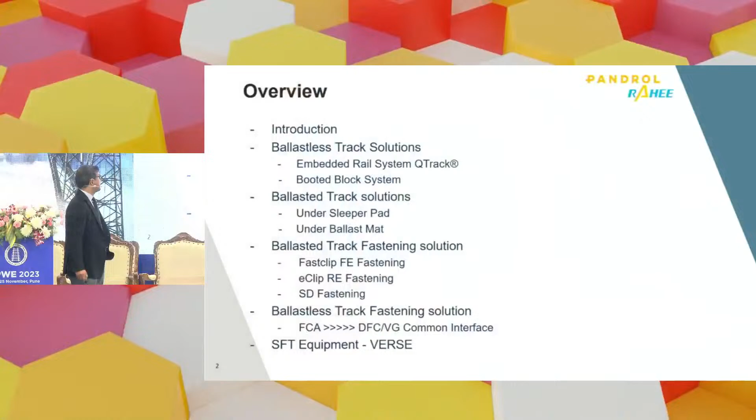So here we go. We have a string of solutions to offer in ballastless and ballasted track solutions, in fastening, in track solutions, and in equipment. Pandrol, as you know, has been a driving force in the rail industry. We have a world speed record of 575 kilometers. We have the longest heavy haul track, and we have the world's highest track in Tibet.

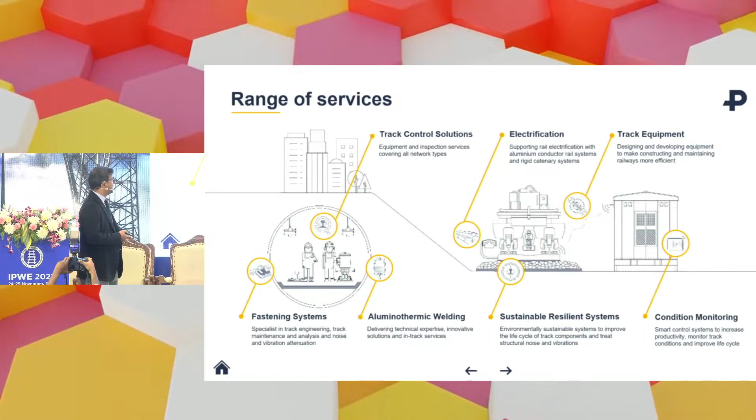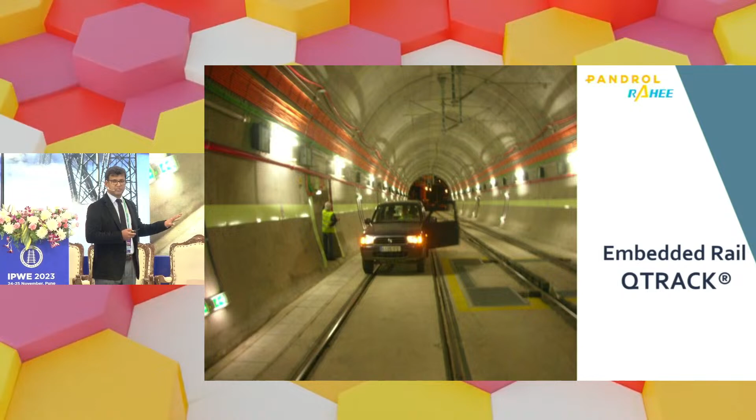The first solution that we are showing here today is the embedded rail system QTrack. QTrack also stands for Quiet Track, but primarily it's an embedded rail system. So here in this picture, you can see that there's a tunnel, there's a train track, but a car is also plying on the same track. So this concept can be utilized in hybrid tunnels in the mountains where the same track can be used for vehicular traffic as well as rail traffic.

Now, this is a continuously supported and clad embedded rail system where, because the rails are completely clad, the stresses in the rail are far reduced, and there are no fasteners, so there is absolutely no chance of corrosion here. And because the rail is continuously supported, the stresses are low, there are no sleepers, so there are basically no additional components for fastening the rail to the track. It is just this embedded rail system.

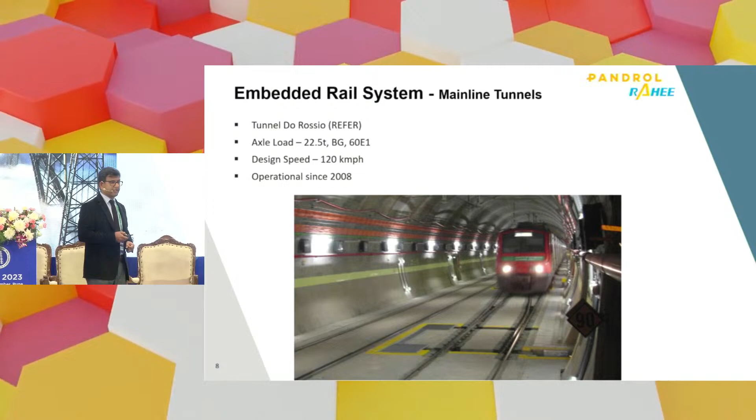Here again a picture from Portugal, in Tunnel do Rossio, for 120 kmph design speed and 22.5-ton axle load. It has been operational since 2008. The system is proven for 160 kmph and higher speeds. A Mirfa depot in Etihad Rail. So we can use this system for hybrid tunnels and for depots.

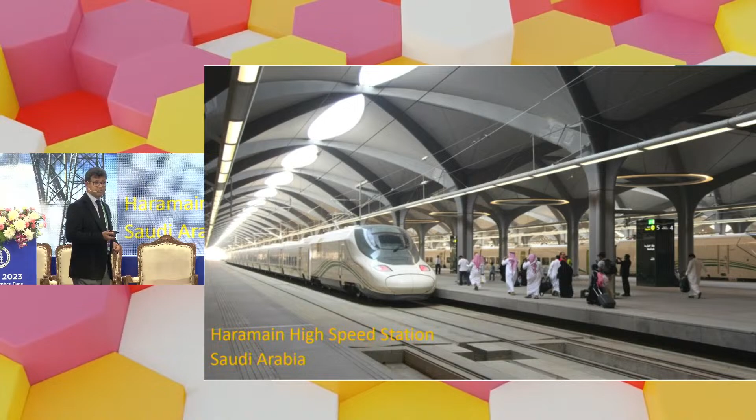This we have done in Delhi, in DMRC Badli depot, where we have laid 1 kilometer of track. This could be used in modern stations to have a very clean look for the track. And this picture is from the Makkah Medina line, Haramain high-speed rail station.

This system offers one of the thinnest ballastless tracks, which can be utilized in tunnels where you have very less height available. Because in tunnels, if you put a ballasted track, it can take substantial height of the track. So this system forms one of the thinnest ballastless tracks in tunnels.

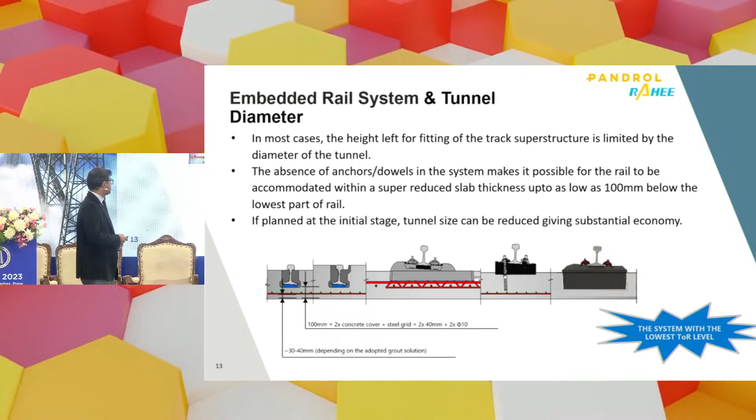Advantages: it's a maintenance-free solution. It's free from corrosion. There's no theft, no sabotage, not prone to any vandalism for the fastening components. Rails are encapsulated, so there is some kind of vibration isolation also available because we are lowering the stiffness of the entire track by putting this solution in.

And the possibility of rail fracture is greatly reduced because of lower stresses in the rail. And it has a very high longitudinal rail restraint, the creep resistance, because the rails are continuously enclad in these rubber profiles. And it can be used both for vehicular traffic as well as for rail traffic.

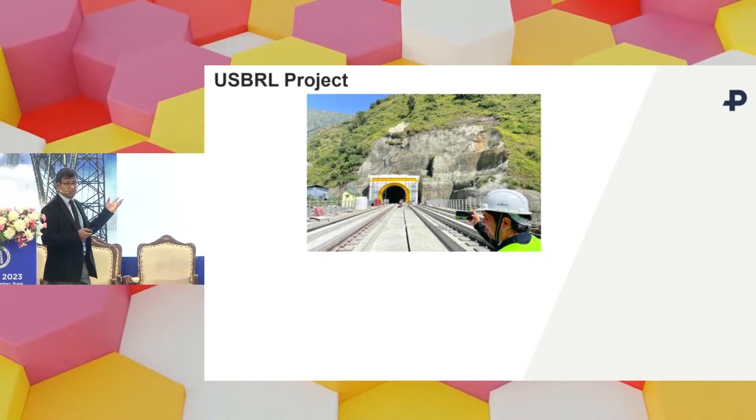The second system is the booted block system. Now, this system we have used in the USBRL project for almost 70 kilometers of track. More than half we have already done. The work is still going on. So we have installed this system in the tunnels, on the bridge, on viaduct, and on embankment as well. So these are all the uses that we have done.

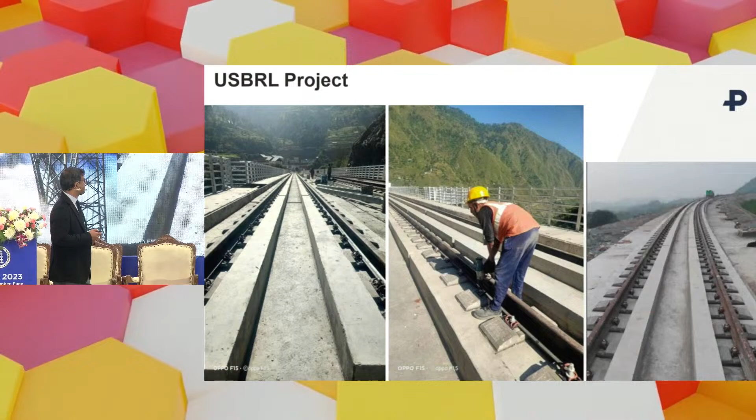These are some beautiful pictures from the mountains in Kashmir, where this system has been installed. The anchors are being installed using a torque tightener here. So look at the system. This is an ideal ballastless track system. Basically, because it's a ballastless track, there's no ballast. So the resilience of ballast, which has gone missing, we have introduced with this booted block here.

And if you look at the distinctive features of the system, this system is the closest and best idealization of ballasted track by virtue of offering a precast rail seat coupled with the required resilience and adjustability as obtained otherwise in ballasted track.

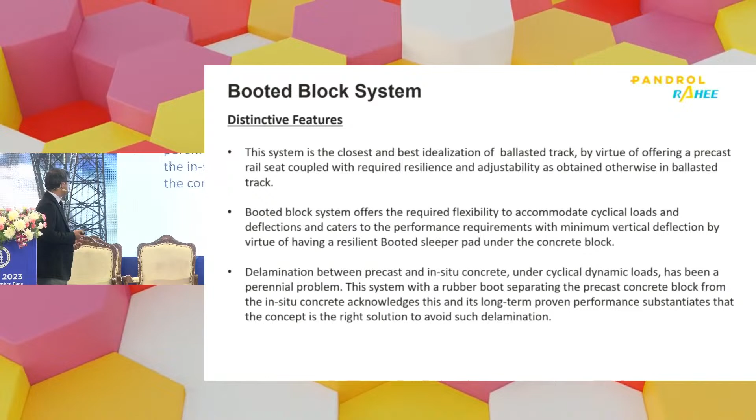Booted block system offers the required flexibility to accommodate cyclical loads and deflections and caters to the performance requirements with minimum vertical deflection by virtue of having a resilient booted sleeper pad under the concrete block. We'll look into the components in the next picture.

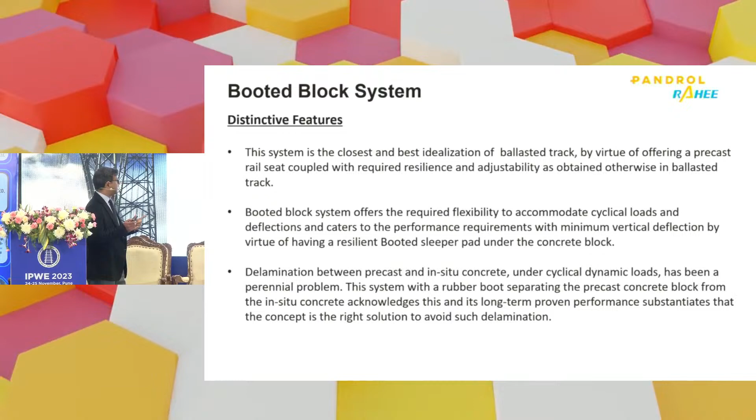Delamination between precast and in-situ concrete under cyclical dynamic loads has been a perennial problem. We have seen multiple failures on that front. This system, with a rubber boot separating the precast concrete block from the in-situ concrete, acknowledges this, and its long-term proven performance substantiates that the concept is the right solution to avoid such delamination between the precast and the cast in-situ concrete if they are juxtaposed against each other without any rubber layer in between. So here, the rubber boot provides that benefit.

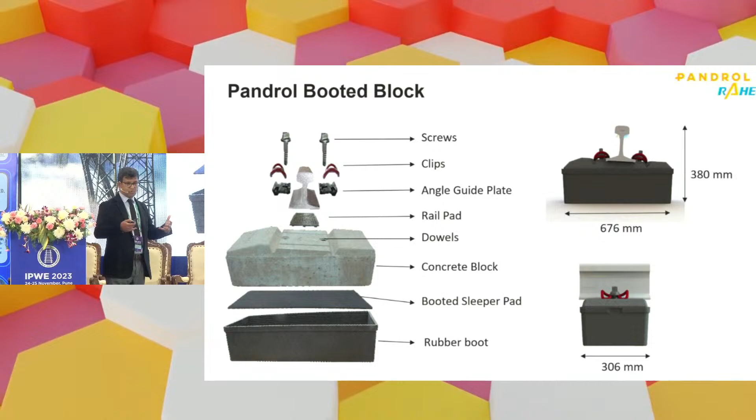Look at the components. At the bottom, you can see the rubber boot, and then there is a booted sleeper pad, which is a resilient pad inside the boot, between the precast concrete block and the boot. And then there are dowels, the screws which go inside the dowels, the rail pad, and the angle guide plate to provide lateral support to the clip, the fasteners, and the rail.

Those are the dimensions of the booted block system. And the weight of this block is 90 to 95 kg. So it's pretty light and can be easily managed by 2 people on site. Quick and easy installation is one of the benefits.

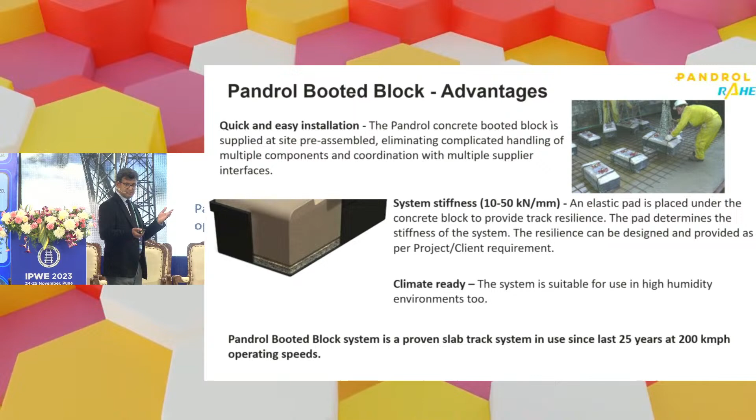System stiffness can vary from 10 to 50 kilonewton per millimeter. An elastic pad can be varied to bring down this stiffness, and the stiffness can be varied by changing this resilient pad inside the boot. It's a climate-ready solution. It can be used in high humidity conditions also.

And this system has been in use for the last 25 years, with 200 kmph and 22-ton axle load provenness. And with USBRL, we'll have more provenness for 25-ton axle load as well.

The system is tested for category C loading as per EN standards, which is for 26-ton axle load. It also provides vibration mitigation, noise and vibration mitigation, so it can be utilized in tunnels where there is sensitive geography. It is simple to maintain and has an ergonomic design.

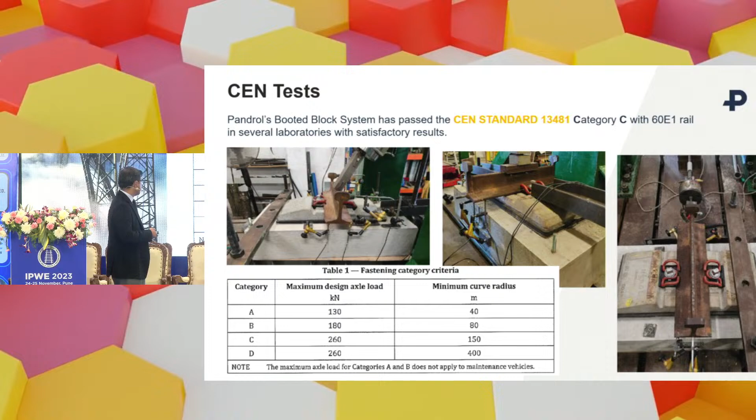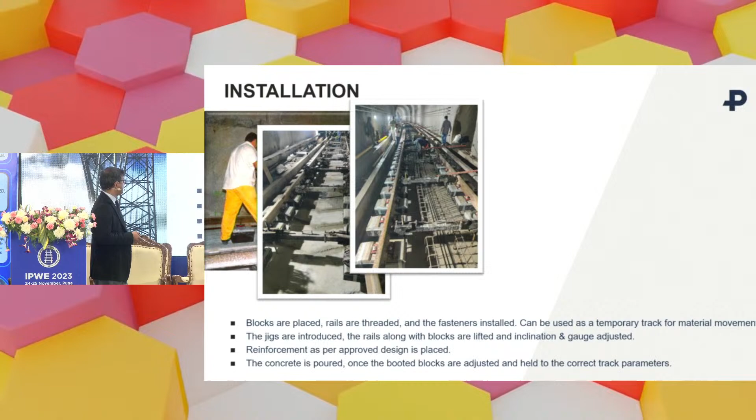The jigs are introduced. The rails, along with blocks, are lifted and inclination and gauge adjusted. Reinforcement as per approved design is placed. The concrete is poured. Once the blocks are adjusted and held to the correct track parameters.

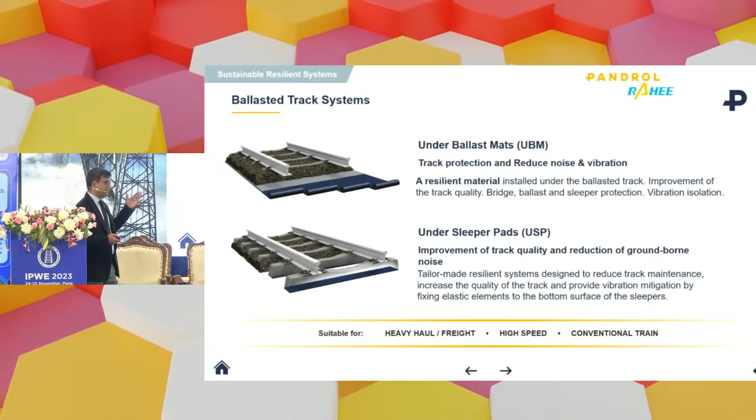Looking into ballasted track solutions, we have under-sleeper pad and under ballast mat. These, again, are solutions which can provide resilience into the track. One UIC study says that you can remove 100 millimeters of ballast from the track by introducing these solutions.

By deploying these solutions, you can have reduction in ballast thickness, long pitch rail corrugation, and airborne and groundborne noise. Maintenance reduction, frequency of leveling, lining, and tamping is reduced.

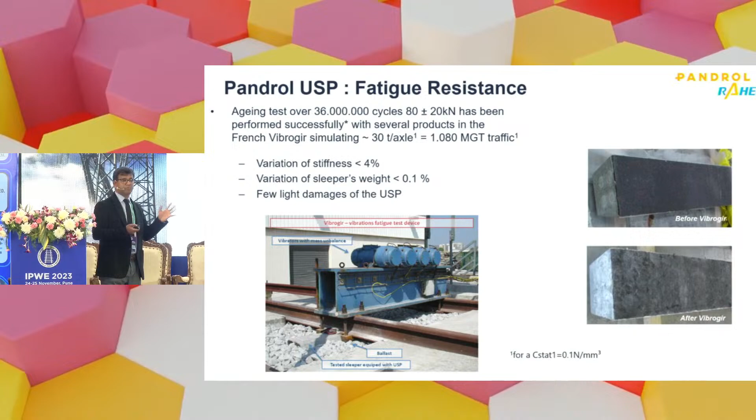Rail corrugations are reduced. This material, this USP, has been tested for 36 million cycles, which is a French Vibrogir test done on this material, and it has passed successfully with a variation in sleeper weight of only 0.1%, and stiffness variation less than 4%. So it performs beautifully with such high fatigue cycles of 36 million.

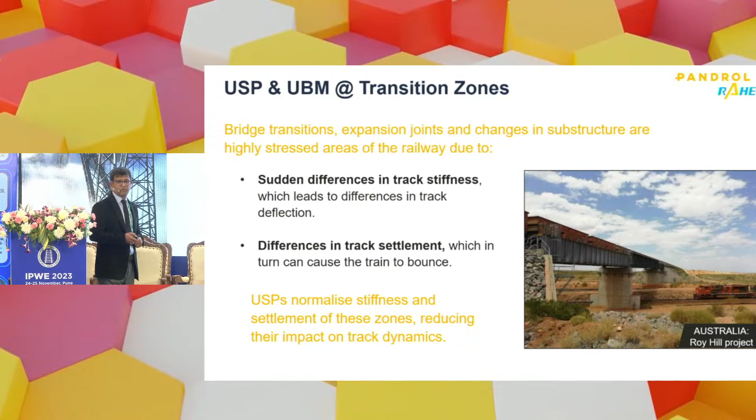The fastening solution for ballasted track, FE, it's a simple pre-assembled system which comes on a sleeper, and it's a unique switch-on switch-off kind of system where it just...

Will you please expedite? Yes, sir.

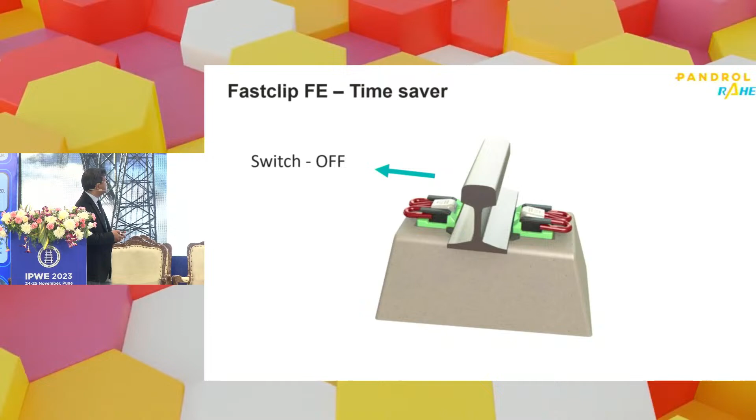Switch on and switch off. So it comes in park position like this on the sleeper, and you just have to push the clips from both sides to put it in the installed condition.

It facilitates mechanized clip installation. It has reduced lifecycle cost. It maximizes uptime. One major benefit is mechanization is possible, and the system comes fully pre-assembled on the sleeper, which makes installation far quicker. These are some of the examples.

Wrap up. Yeah. Kindly wrap up, please. So,

These are some advantages. This is a screwed fastening, which can be retrofitted on System 300. It also comes pre-assembled. It has a very compact design, and it's environment-friendly and quite an adjustable fastening solution.

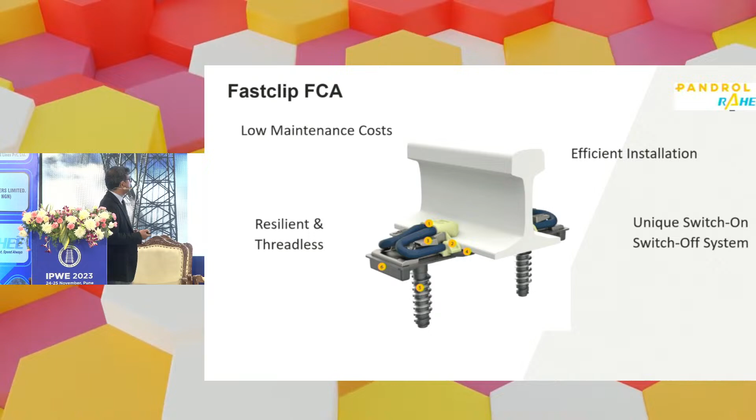These are a few applications for heavy haul. This is another Fastclip-based solution. It can be used on a ballastless track, and it can be switched on between different solutions on the same sleeper for having lower stiffness.

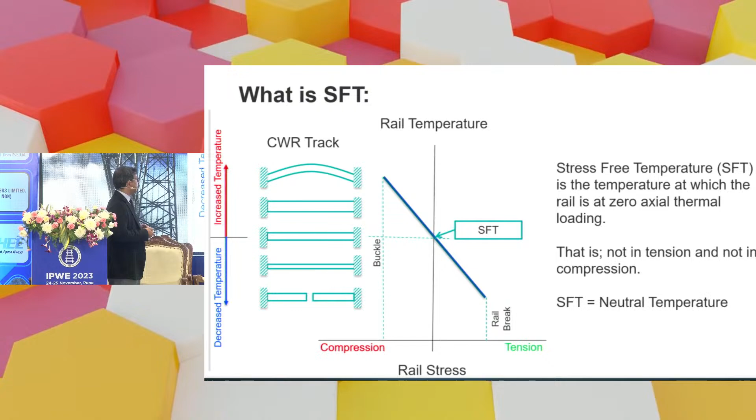This is VERSE, a stress-free temperature measurement device, which can measure stress-free temperature for any given track. It stands for vertical rail stiffness equipment. It's a non-destructive method of measuring stress-free temperature of CWR, and it's a recognized standard for measuring risk of track buckles and rail breaks. It can be used as a routine survey tool and as a spot check, as a quality control tool as well.

This is just theory. You're all familiar how we measure this SFT by utilizing the stress strain formula, giving a certain load to the rail, lifting it up, and measuring the vertical displacement. We find out what the SFT of the rail is at that time.

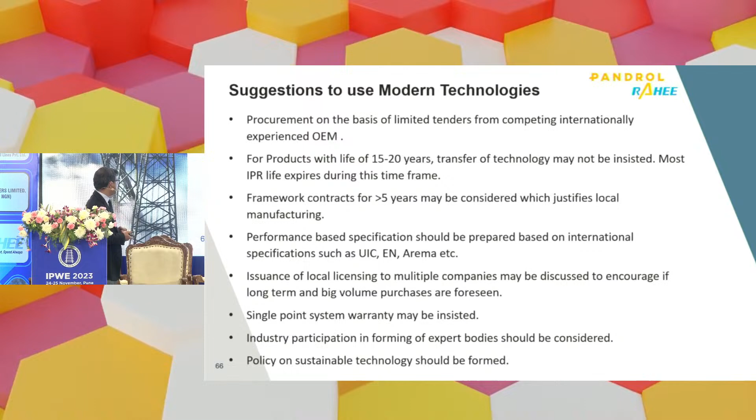Performance-based specifications should be prepared based on international specifications such as UIC, EN, AREMA, etc. Issuance of local licensing to multiple companies may be discussed to encourage long-term and big volume purchases if foreseen. A single point system warranty may be insisted upon.

This is the very important point for having modern technologies in place. Industry participation in forming expert bodies should be considered, and policy on sustainable technology should be formed. Thank you.

This is rather large, so it's very blurry to me, but probably okay for you at the back. This is the problem: gauge corner cracking. This is what went wrong at Hatfield.

They're very close together defects, probably 20 mil long, and about 4 mil apart in this case. That's actually what happens if you break the rail open, and this is the fatigue crack. It's a very strange shape because the stress patterns are very strange, if you like.

Right, we do have a lot of things to do. So we worked with a company who are actually French, but they make NDT equipment in the UK, at least used to, called Geismar. That relationship now has ceased because Geismar no longer wish to support NDT equipment in the rail industry. So we have the trolley at the moment.

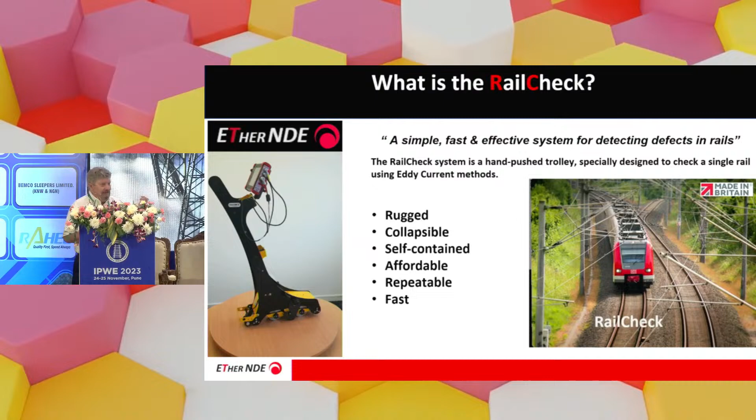The advantages of using eddy currents are many, really. It's rugged, the system is collapsible, it's all self-contained, and there are lots of other advantages. There's no water, it weighs 9.5 kilos, it's affordable, repeatable, and fast. But we will have to go fast to keep going, and by fast, I mean something like 4 to 6 kilometers per hour.

There's no need for surface preparation, no couplant, and it has excellent lift-off characteristics. It's really tolerant to changes in shape of the rail. It's excellent for detecting surface breaking defects, which is pretty much all it does, in contrast to UT, which looks for subsurface defects.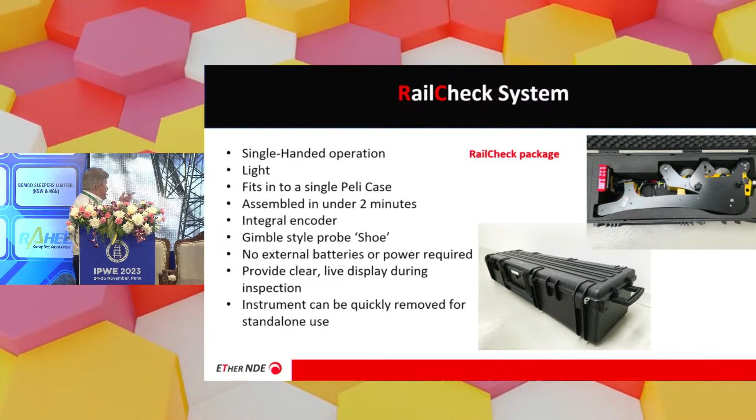The probes are fairly easy for us to make. It's single-handed operation and fits into a single Peli Case, so that's basically... it sits in a single Peli Case, can be readily transported to site, and it collapses down, very compact.

This is kind of what it looks like. This is it in use - very easy. The system is encoded, and we can log many tens of kilometers of track on the small unit attached to it. We'll keep going, since we've now got 7 minutes and 11 seconds.

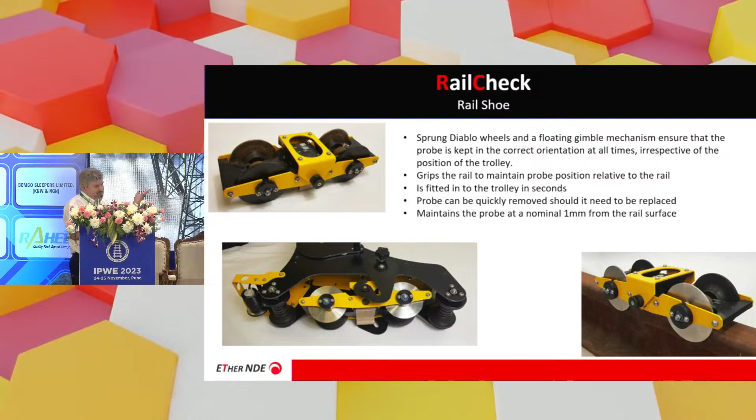The system has a series of rolls - some fixed, and then, taking a concept from the rail industry, there's a bogie here, and the probe itself does not contact the surface. We normally set a 1 millimeter gap to maintain it at a reasonable distance from the material surface.

The probe looks like this - here's one in my hand to give you some idea of scale. It's curved to go round the gauge corner, and it splits into doing one inspection of the whole head of the rail, then a more critical inspection of the gauge corner. We'll see that in a second. It covers 30 millimeters around the radius of the gauge corner, and the probe is actually 2 channels, with 2 strips of data.

The instrument is fairly compact, very easy to hand carry, and can also be used for standard eddy current applications like looking for cracks around fish plates, etc., which is kind of the most common use.

We can store over 1,000 kilometers of data on our instrument, which is more than anybody else wants, really. There's a user interface - we won't go into that too much, but basically you can operate it, put in waymarks and all that kind of stuff while going through it. We developed this with help from people in the railway industry, so this is not something we made up ourselves.

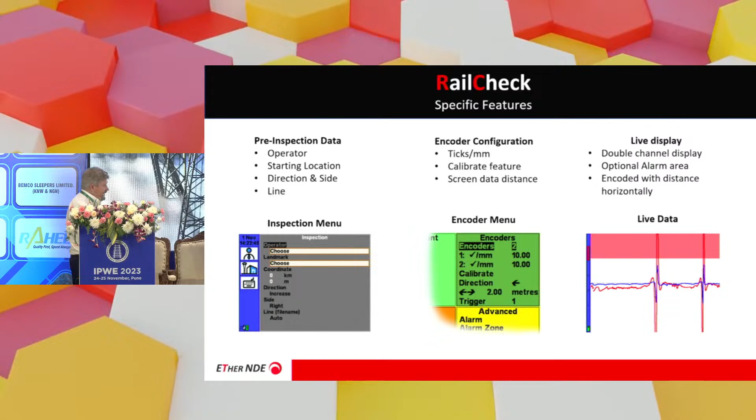We have a 2-channel display - you can see there's a red and a blue trace here. There's also a PC application that allows you to zoom in, move along the length of the track, and see where you've got problems and defects.

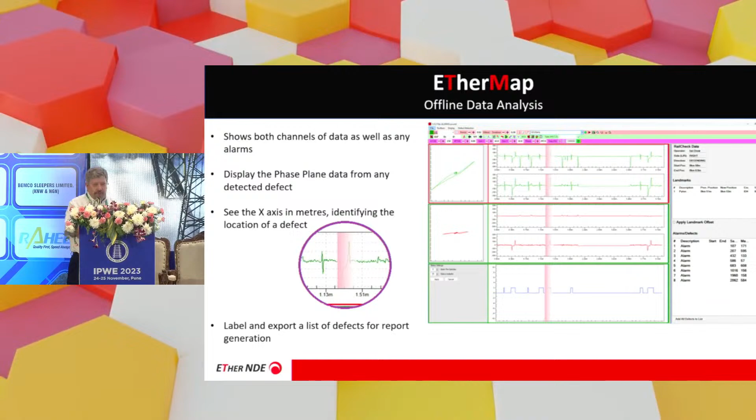One interesting application is, yes, this could be used to find defects in an in-service rail, but also, if you grind the track mainly to remove cracks and other defects, you actually disguise the fact that there are defects there as well because of the surface texture. We can run this behind the grinding train and find defects. So I think it can be used in conjunction with UT to make the UT better, but also it could, in its own right, have some reason for existence.

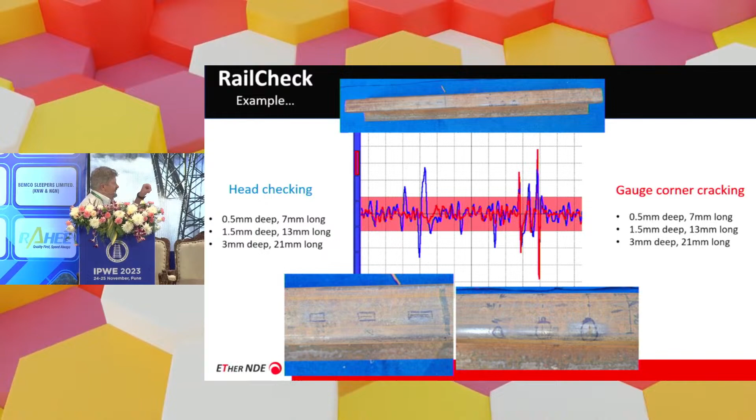If we now go onto the gauge corner, these 1, 2, and 3 responses on the right-hand side - you can see on the left the longitudinal defects are in blue, and if we go over to the right-hand side, we see we're now getting red and blue spikes in the same place. That's because these are confirming that these defects are in fact gauge corner cracks, and the severity changes in line with the relative size of the defects.

Modsonic are distributing this for us exclusively, and we are working with Modsonic on making it for the domestic market in India - that's the plan. Modsonic is part of the Elecon Group, which is a very respected business here in India, and we're from the UK, as we said.

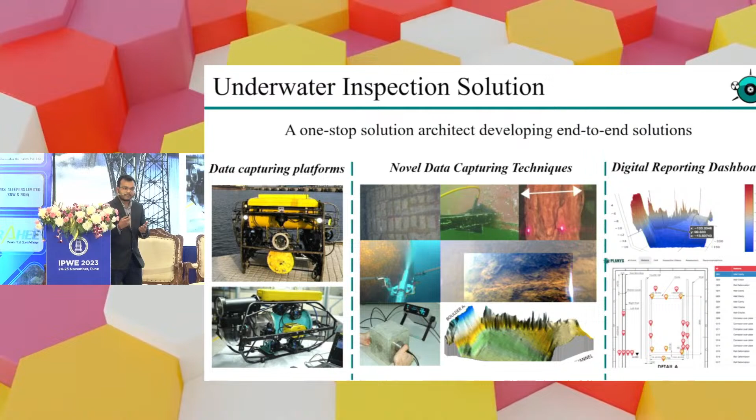So already this has been deployed in more than 100 railway bridges across India. On 10 railway bridges we've also done 3D scanning. More recently, we've also piloted real-time scour monitoring, and more than 300 reports have been generated out of this technology. Of course, this technology has several other applications that we've deployed it at.

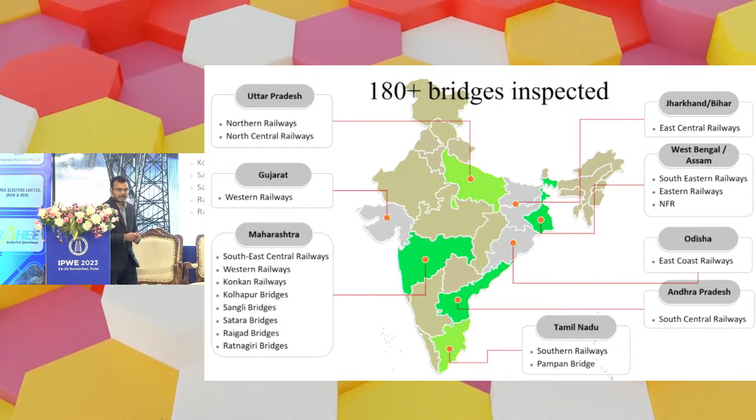So this technology has been deployed in many parts of India. There are some highway bridges as well, state highway bridges, where this has been deployed. I'll just quickly go to the video in the interest of time.

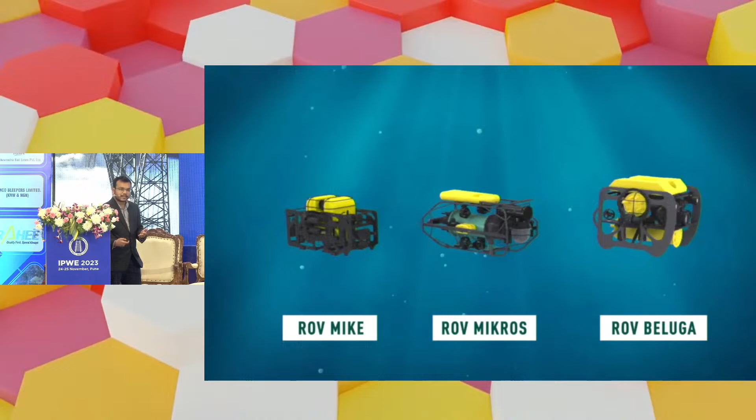So most inspections have been done with divers in the past, and over the last few years, underwater robotic technology has been deployed. These are unmanned robots that go in the water instead of the diver and collect different kinds of information. We have developed our own systems here. There are many other systems available, and these are lightweight, portable, easily deployable. And since we've built it ourselves, we have the ability to customize by integrating many other sensors.

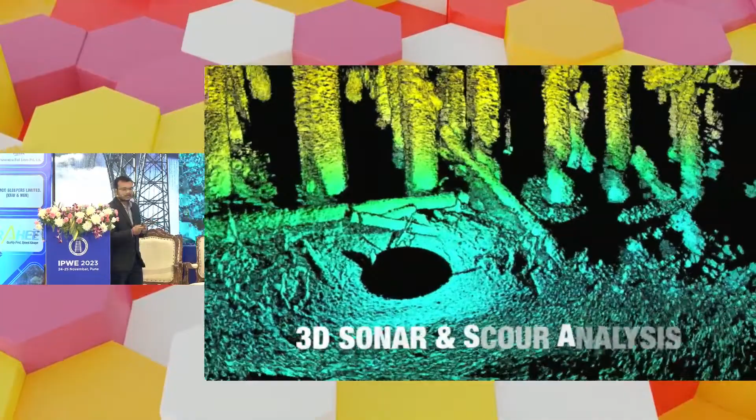We can also extract dimensions of these defects. And we also do inspection in murky and turbid waters, as many rivers are very murky. Moving forward, we've also integrated bathymetry survey, sonar survey, which we can do in 2D and 3D, where we recreate the complete environment. And more recently, we've also introduced some underwater concrete testing sensors that tell us more beyond visual inspection. I'll come to the dashboard piece after that.

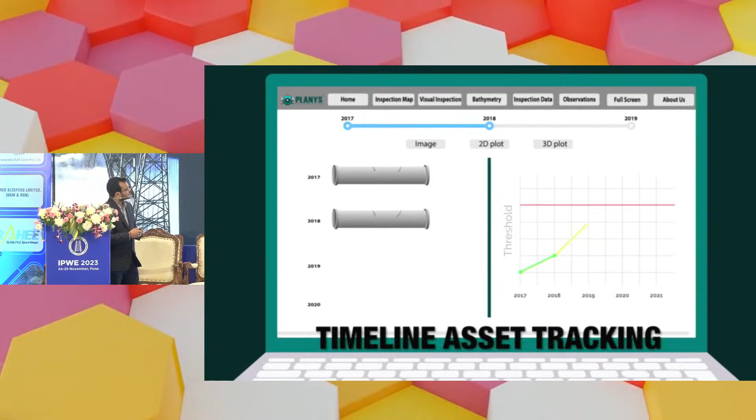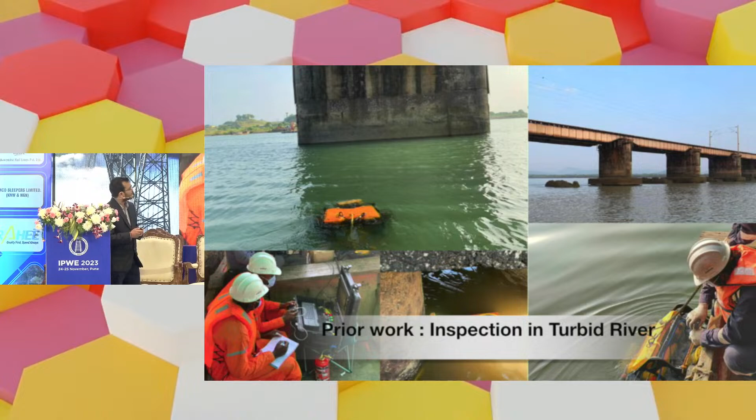Just some visuals of site deployment coming up now. This is a slightly older video, so this number has been quite updated. We've got the opportunity of doing some iconic bridges. We did the Pamban Bridge, Krishna Setu in Bihar, a few turbid water rivers in Hooghly for Kharagpur. And we've also done some other smaller bridges for highways.

When we need to do riverbed profiling, this converts to a surface craft, and then we collect GPS data and underwater data and tag it. It's a very young team working behind this over the last few years. This R&D lab is in Chennai, and we have young engineers working on this technology solution.

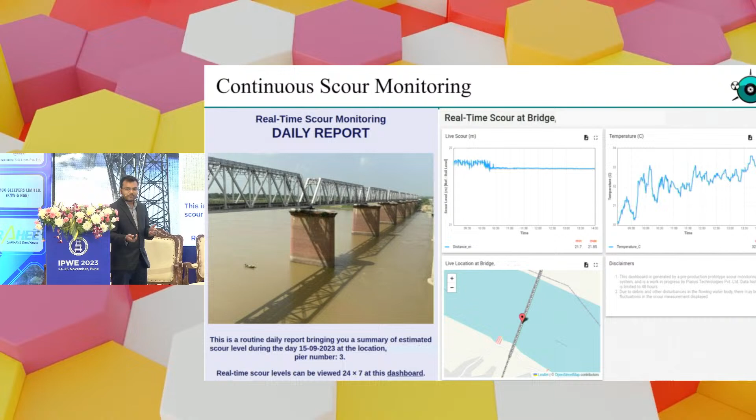More recently, we also got an opportunity to pilot real-time scour monitoring, which has been required over the last few years, where we deploy fixed sensors mounted on the piers in submerged conditions, and data collection continuously happens. Where this becomes important is that most bridges may be unmanned, and as rivers flow over a period of time, scouring information could be relevant.

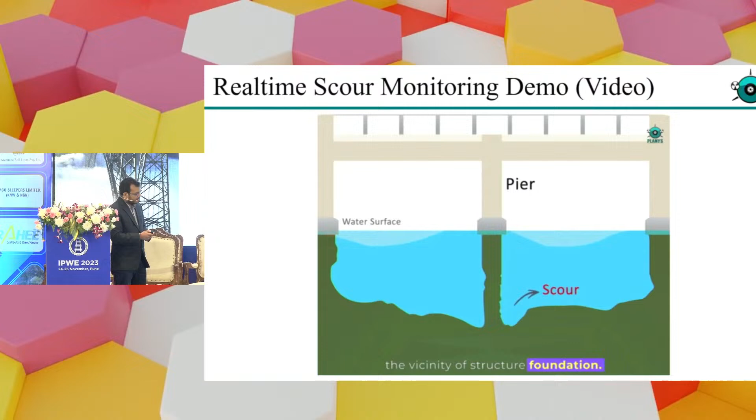So this gives real-time scouring data, and then we can put alerts if it crosses a certain threshold, when alerts need to be sounded. It's a sonar-based sensor that's mounted on a truss system, which is installed on the pier. So this continuously keeps taking the data.

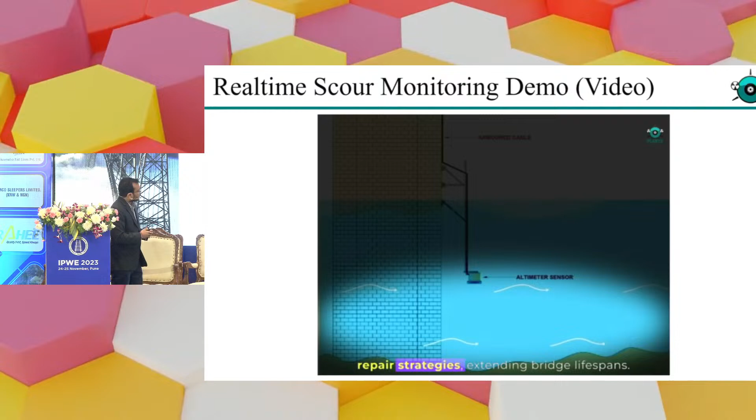We collect data every minute, so over a 24-hour period we have enough readings, and we can then figure out plots over months, seasons, and in case there is a flooding event during that period, we have enough data. Challenges in building this are to make it proof enough so it doesn't flow away with the river, and to make it so that nobody takes it away.

So the cabling goes up, we have a solar panel powering the control box, and all the data keeps getting pushed to a cloud, and that is the final deliverable that goes to the railway engineers.

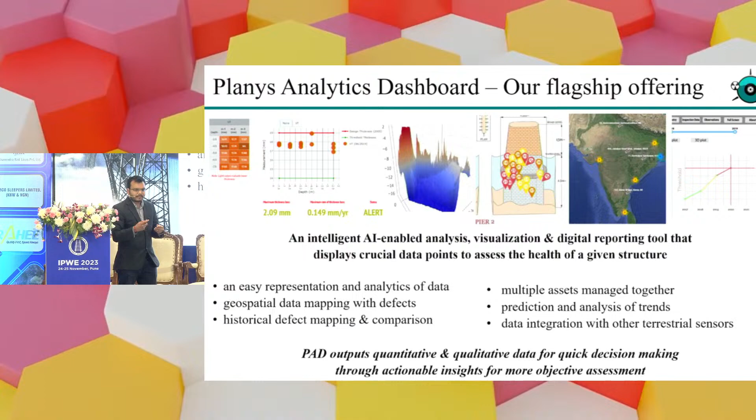Yeah. So once the data gets collected, one of the biggest challenges earlier when we spoke to customers was: we do a bridge inspection, it takes us say 2 weeks. 2 weeks means 6 hours a day over 14 days, 100 hours of data is collected. And it's a very big challenge reviewing these reports, reviewing videos. And often this data can only be used a single time, because how does one compare 100 hours of videos every year?

So we also put together a digital platform on which data gets put, and we get hotspots of which part of which pier, at what depth, what the defects are, and then you have a clear nomenclature of these defects. And when we click on these defects, you get a video and image of it. So apart from a PDF, this is also delivered. This is a preview of what it could look like at scale when multiple bridges are inspected. So you have one central repository for data management.

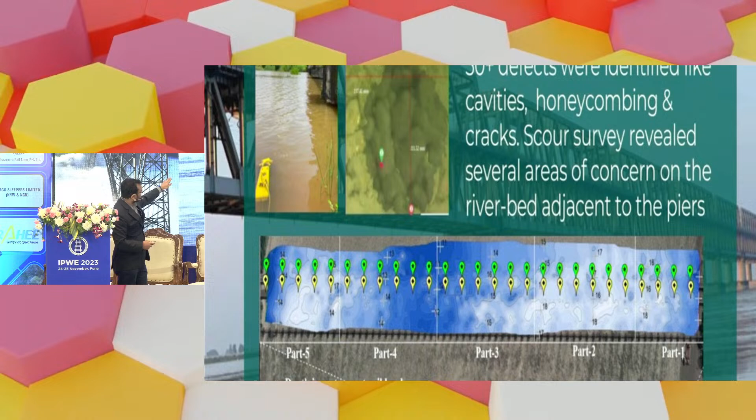A few case studies. So we did a bridge where you can see some of the defects that were found, and these were around cavities, honeycombing, turbid waters. And in another bridge in the same zone, we also did the riverbed profiling. So finally, there were some sections in light blue where you can see potential scouring could have happened, and that was relevant information for the engineers.

Another one, so this is a very interesting case. This is not in railways. It was for a state highway bridge where tilting was observed in one of the piles, and we were called in. So first we did a 3D sonar survey. We found a potential crack, and then we supplemented it with a visual inspection to identify that the crack did exist. And because these well foundations were many, it would take time to do visual inspection. So 3D sonar was the fastest, and this was the result. So this is the center pier.

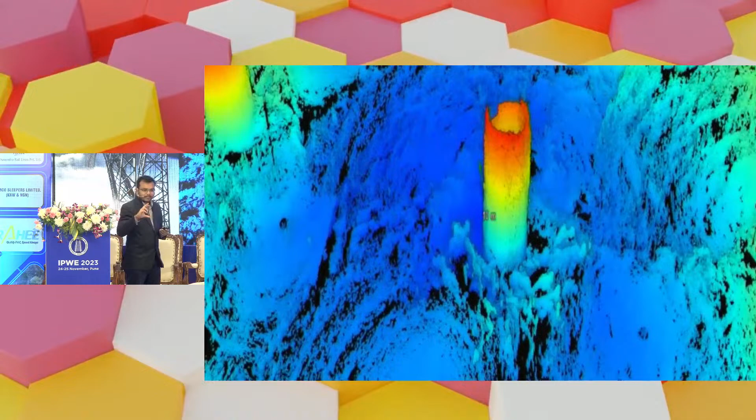So finally, what was found is scouring was 100%. What I mean by that is, at construction, the water level was 10 meters, the bed was 10 meters, and there was bedrock. Now we have 20 meters of water. So 10 meters of bed has been eroded over 50 years, and this is resting on the bedrock as of now. There we can see a horizontal observation, potentially a defect, which we then did visual inspection on.

The last case study, again, is for a highway bridge where we found cavities so big that a complete machine went inside and came out. And we're talking about a 1 meter length of machine. And it's a river that perennially has water. And so you can see the heat map. So this bridge was immediately shut down and repairs were done immediately.

So that brings me to the end with time up. There is just one last 30-second use case. We recently also deployed this technology for bridges that were recently made. Often we get the question, bridge to naya hai, inspection kyo karna hai? So surprisingly, there were many construction defects. When the foundations were laid, there were several defects found.

And if inspection was done 1 year later, authorities would have been scared that the deterioration had happened so much in 1 year. This was done in time, before the contractor had signed off. So the contractor was called in again to repair those defects and hand over the asset in prime condition. So a due diligence or handover survey is also relevant, because underwater one cannot see after construction unless you get data. So that was another interesting example of how this can help keep assets safe.

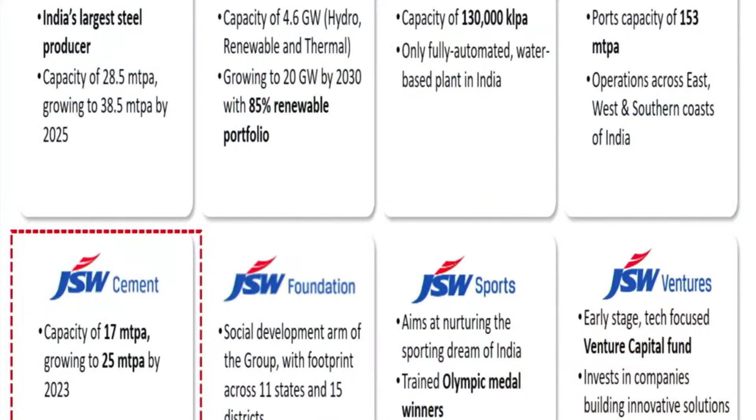About the JSW group, we have total 8 verticals, starting with JSW Steel, which is our parent company. Then we are present in energy, paints, infrastructure, cement, foundation, sports, and venture. JSW Steel being our parent company. So talking about JSW Cement, we have a current capacity of 17 million ton. We plan 25 million ton by the end of 2023.

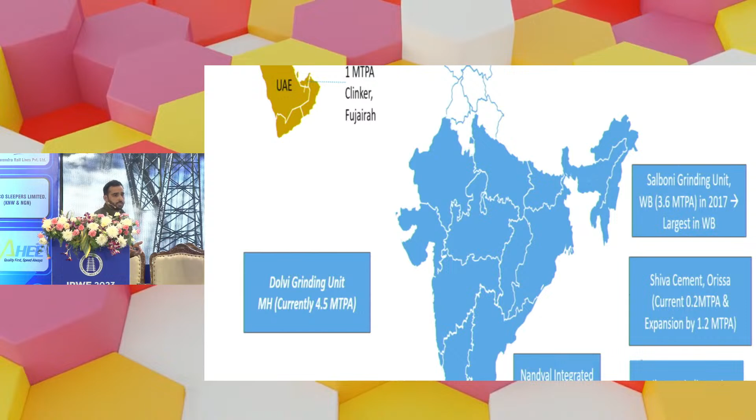Through sieves, we take out the blast furnace slag. Then we quench it with cold jets of water. From 1500 degrees Celsius, we bring it down to 100 degrees Celsius. This is how the process starts. GGBS basically is a partial replacement of OPC and other cementitious supplementary material. As per Indian standard, we can replace OPC cement anywhere between 25 to 65% as per the various applications of the concrete.

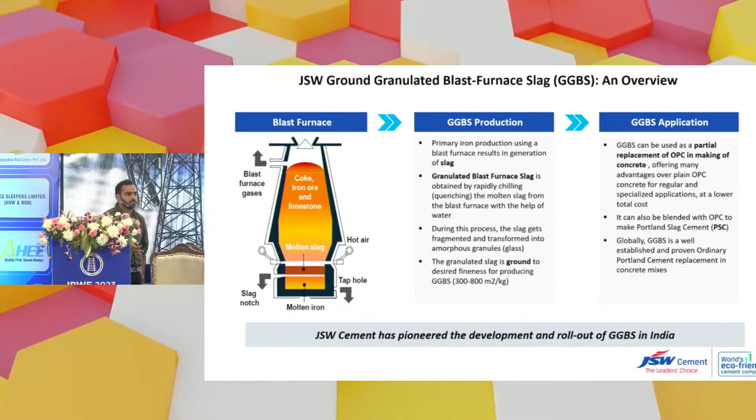So this is how GGBS works. When OPC reacts with water, CSH gel gets generated. In addition to the CSH gel, there is calcium hydroxide also, which basically has a nature of expansion. You may see a lot of concrete cracks in mass concrete structures. GGBS reacts with Ca(OH)2 and further makes CSH gel, which helps long-term strength and durability.

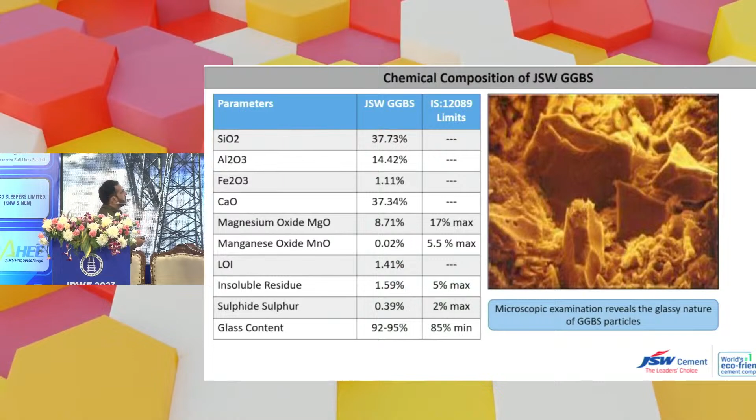This is the chemical composition of GGBS. It has silicon dioxide around 37%, calcium around 40%. It comes from the cement family only. If you see the chart, it has a lime content around 40%, whereas cement has a lime content of 62%. That's why we say the product is related to the cement family. Fly ash has only 2% lime content, which basically reacts with the water.

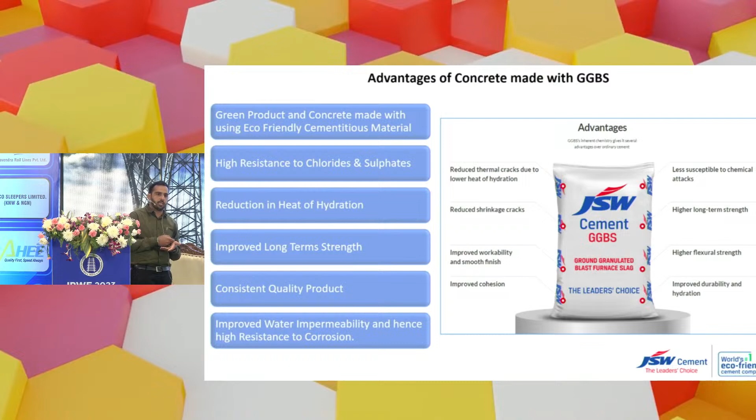These are some of the advantages of concrete made with GGBS. First, it's a green product, concrete made with eco-friendly material. Secondly, it has high resistance to sulfates and chlorides. Reduction in heat of hydration: in railways, there are a lot of mass concrete structures where we need to lower the heat of hydration. There, GGBS could be helpful. Cracks can be avoided. Long-term strength of the structure can be improved.

So this is a very interesting study conducted by IIT Mumbai. We have a short time, so I'll quickly update on that. IIT Bombay conducted testing at 3 days, 7 days, 28, 56 and 365 days. 100% OPC at the age of 365 days is providing a strength of 67 MPa. Basically, they did the trials on 400 kg cement and various replacements, 60-40, 50-50, 40-60 and 30-70, were done.

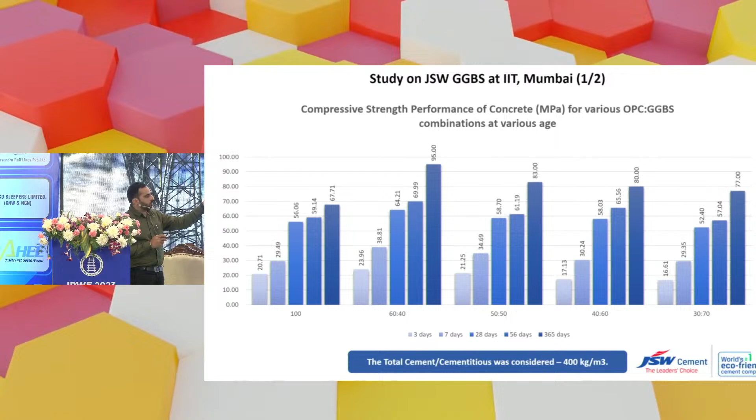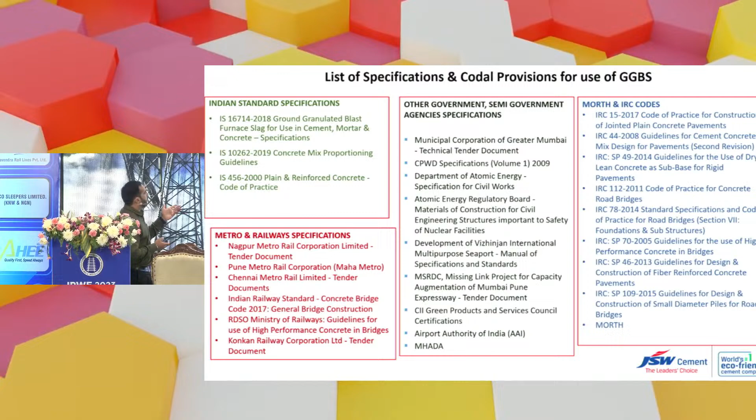These are the major infrastructure projects where we are approved: Maha Metro, Municipal Corporation, Nagpur Metro Rail, MSRDC, NHAI projects. These are the list of specifications and codal provisions. GGBS is manufactured as per IS 16714. We have various approvals from the municipal corporations of Mumbai, Pune and Nagpur regions, and the metro. Recently we have started supplies to DFCC projects as well.

And we have recently been approved by MSRDC and additionally the Airport Authority of India, where in PQC, paving quality concrete, GGBS is mandatory to use. We have different approvals from MORTH and IRC as well.

So coming down to the sustainability part, what the entire world is talking about, even our PM Modi is also talking about lowering down the carbon emissions in India. So if you see, cement is contributing almost around 7% of the entire CO2.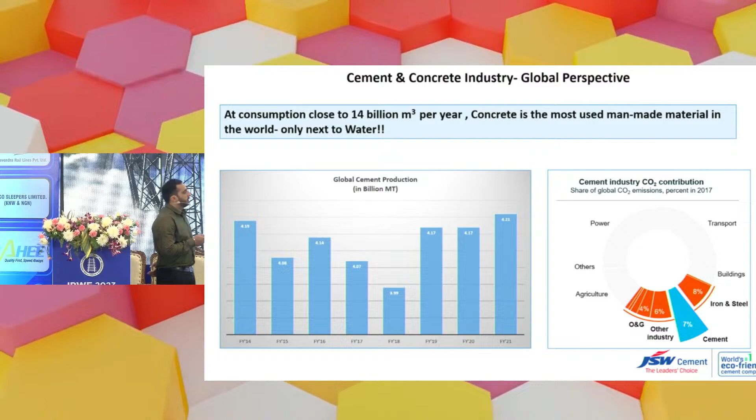So JSW, with our product GGBS and the slag-based mixed products, has a solution to lower the carbon emission anywhere between 25 to 44% depending upon the structure, the type of concrete, the type of strength which you desire, because the GGBS replacements are anywhere between 25 to 70% without affecting the concrete strength, the durability and the sustainability.

Our products are IGBC approved. We have approvals for our GGBS and the PSC cement from IGBC. Recently, we have received approvals from GRIHA as well.

This is a very interesting chart. If you see the global average, it shows if 1 metric ton of cement is produced anywhere globally, across all the cement companies, on average 608 kg CO2 is generated. India is doing far better than global. We have 560 kg of CO2 produced for every 1 metric ton of cement. JSW has only 216 kg CO2 produced for every 1 metric ton of OPC. That's why we are called the world's first eco-friendly cement company. We are only at 216 kg.

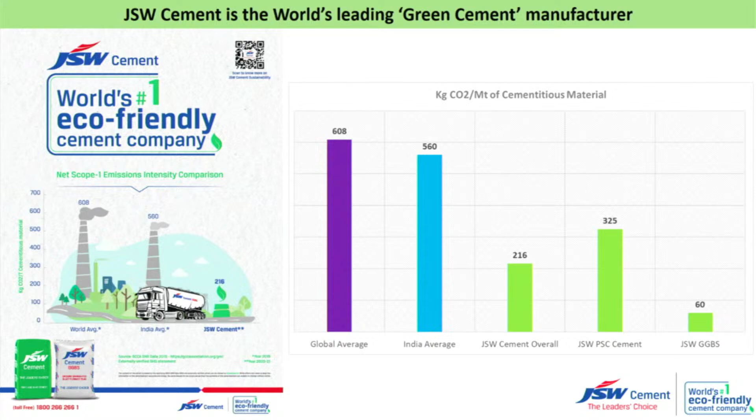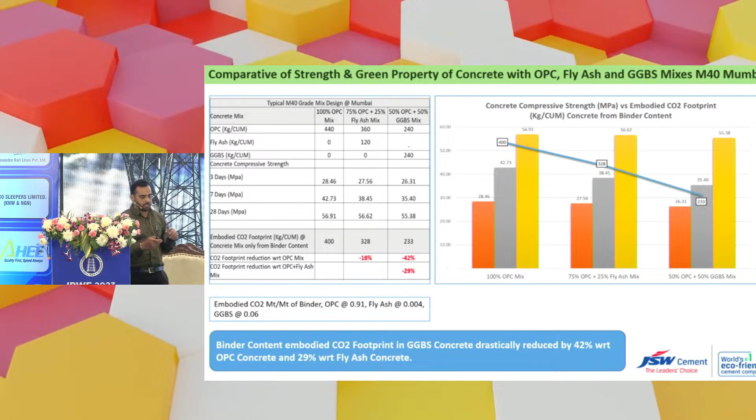In the last 6 years, with the GGBS which we have sold to various infra projects, around 8 crore cubic meters of concrete was produced. With that reduction of OPC, around 1.233 crore metric ton OPC was saved. Since OPC was not manufactured, electrical energy got saved, thermal energy was saved, and mainly around 91.2 lakh metric ton of CO2 emission was not released to the environment.

As per the thumb rule, one tree in its entire lifespan consumes around 1 metric ton of CO2. If you see around 91 lakh metric ton, it is almost like we have contributed planting 91 lakh trees.

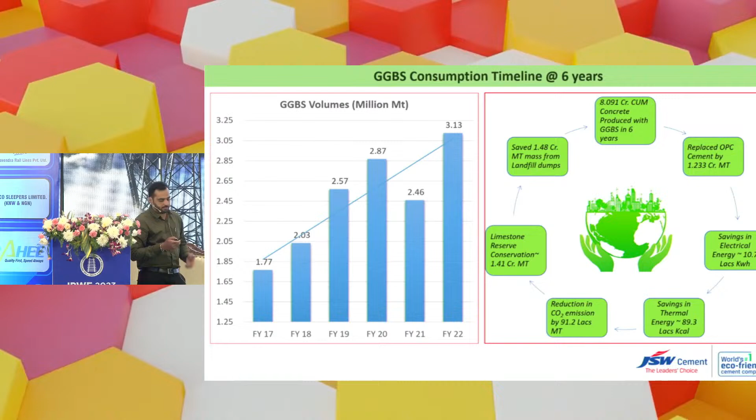These are a few case studies: underground metro rail, Colaba to SEEPZ. These are mix designs with almost 45% GGBS. We are also approved in Airport Authority of India, Kempegowda International Airport. There it was used in the PQC structure. Cable-stayed bridge, Zuari Bridge, which is in the southern part of Goa. You will see the beautiful structure. It is entirely made with GGBS. Cable-stayed bridge mix design. AP Amaravati is a new capital, which is currently on hold.

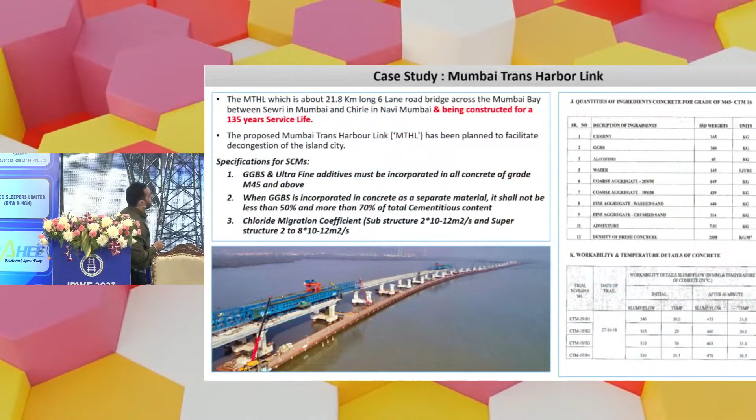This is a very iconic project. Everyone must have heard about it. The MTHL, Mumbai Trans Harbour Link. From the start of the project till completion, we have supplied a huge quantity of GGBS to this project, L&T. If you see, the replacement was close to 65% in the mix designs.

Pune Maha Metro. These are the major infrastructure authorities where we are supplying GGBS, like CIDCO, Mumbai Municipal Corporation, MSRDC. These are some of the government contractors like Tata, L&T, NCC. Some commercial developers using GGBS. These are some of the contractors. These are the major commercial RMCs which are using our green products. In the major residential and building segments also, we are present across Pune, Mumbai, Hyderabad, Chennai. All the major developers, we are supplying material to them.

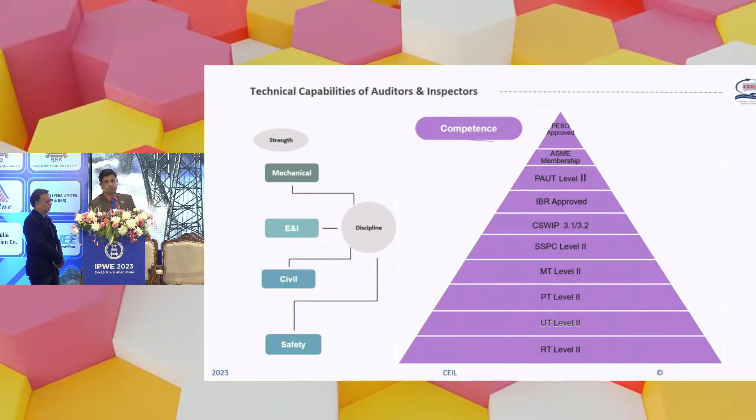These are the technical capabilities of our inspectors and auditors. We have competent inspectors in all fields of engineering: mechanical, electrical, instrumentation, telecom, civil. We have safety people also, and their competency starts from NDT level 2. We have CSWIP 3.1, 3.2, SSPC, that is painting course level 2, PAUT level 2 people. These are some major clients, including Indian Railways, KRCL, state governments, Petrofac, ONGC, etc.

This is our entry gate to railways, the USBRL project, where we were involved in the Chenab Bridge as a quality and inspection agency, and Anji Bridge also, which is the first Indian Railways cable stay bridge. Apart from these two bridges, we were also part of USBRL's 16 major bridges, where we provided quality and inspection services. Apart from this, we also do inspections at vendor end for bearings, HSFG fasteners, sleepers, paint material, steel material. Here are some pics of Anji Khad Bridge.

This is offshore expertise, where we have spent 30 years till now. I wanted to explain something about offshore. Offshore is extraction of oil from sea. So this is the deck, and this is the jacket. This jacket is inside the sea till 70 meters. Seabed is at 70 meters, and the piling is at 150 meters. So we were involved in that heavy fabrication.

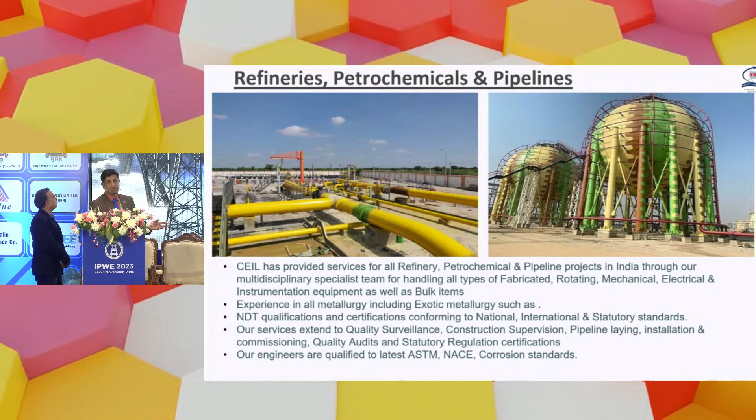This is our credentials for refinery, petrochemicals, and pipelines. We have provided services to almost all refineries till now, and we have specialized engineers in all streams: electrical, mechanical, instrumentation, civil, health and safety, and they can perform inspection at vendor's end for procurement as well as during the execution of the project.

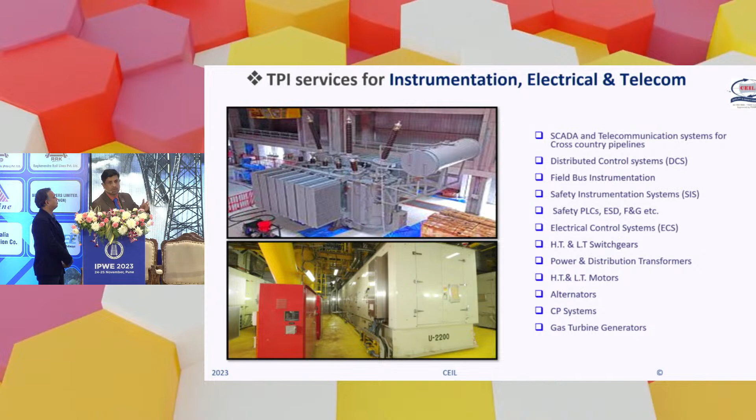We are into infrastructure. We work with various municipal corporations on building construction, road construction, water treatment plants, etc. Our expertise in instrumentation, electrical and telecom: we do inspection at vendor end from generation of power, meaning generators, transformers, motors, HT/LT cables, till switchgears. We also do DCS, PLC at vendor end as well as during execution, installation, and commissioning of all these systems at site.

This is something where we are expert, a legacy of 25 years of CEIL: expediting services. This is very important for timely completion of a project. Here we provide support to the client from the issuance of PO to the vendor or contractor, and we ensure monitoring and reporting of the project, and if any hiccups, raising red flags to ensure completion of the project on time. It includes drawings, approvals, and we have dedicated formats for the reports.

This is where CEIL can help, and its importance in these terms. We are independent, impartial, a third eye to ensure quality. Expert, specialized engineers, as I explained earlier, who ensure quality assurance, risk mitigation, efficiency, and meet the timelines with compliance of codes and standards, whether international codes, RDSO codes, or IS codes.

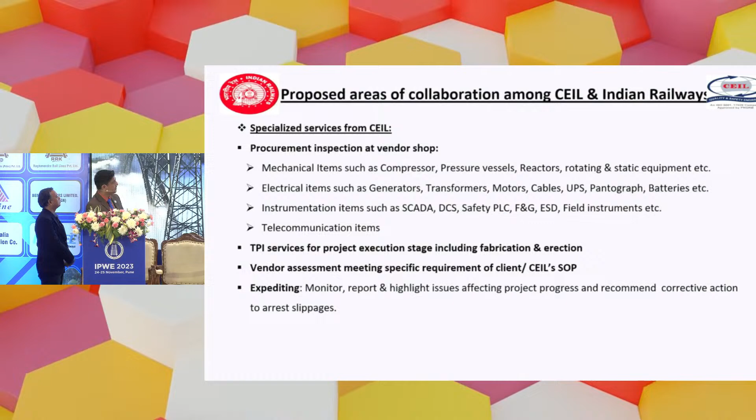We have our own system and can follow our SOPs or client SOPs as per requirement. We do expediting to monitor, report, and highlight issues which can affect project progress and ensure timely delivery. We do quality assurance, with standard formats useful for railways to develop quality documents like ITP, QAP, FAT, and we can also review it post-development.

Technical services help during execution of the project. Construction supervision services, starting from incoming material inspection, through commissioning, mechanical completion, till handover to the client, ensure all stages are completed in compliance with required standards. We do structural audits, HSE audits, electrical safety audits, energy efficiency audits, and remaining life assessment of structures with the help of our parent company, Engineers India Limited.

In terms of HSE systems, we can formulate procedures and reporting formats for railways. We have our in-house formats and can also help during execution of HSE activities.

Our expertise can be utilized across sectors of Indian Railways, especially bridges, station development, route electrification, and signaling and communication systems. Over to my colleague Anirban Datta.

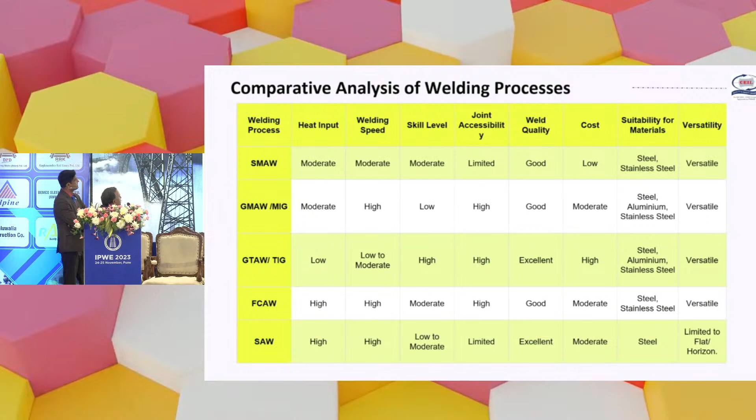We made a comparative analysis of different welding processes against their parameters to see which are more suitable to the jobs. SAW welding is limited to the flat position but has the advantage of high speed and good weldability. Due to the geometry of components, where SAW cannot be used because of portability issues, FCAW and GMAW can be used instead. SMAW is used for non-critical items like handrails and other non-critical components.

We always ensure approved WPS, relevant consumables, welder qualification as per the relevant process and position, with position playing a vital role. Proper welding sequences and methodology, monitoring welding parameters like weld geometry, polarity, current, voltage, travel speed, backing, flux and electrodes, preheat and interpass temperature, are always checked by our engineers to ensure sound quality.

We have observed that many industries miss these stages, so we always make sure these determinants are ensured.

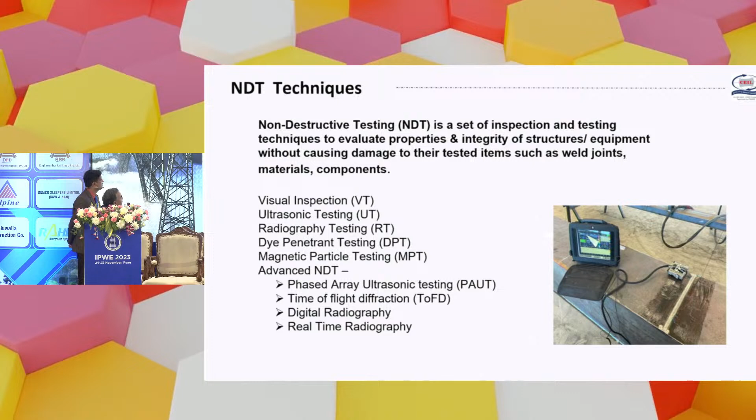Our engineers are very competent in NDT techniques like VT, ultrasonic, RT, DPT, MPT, and advanced techniques like PAUT and TOFD. We have qualified PAUT and TOFD interpreters.

Magnetic particle testing and DPT are also carried out for surface and subsurface defects up to 2 to 3 mm, and our engineers are well competent with this.